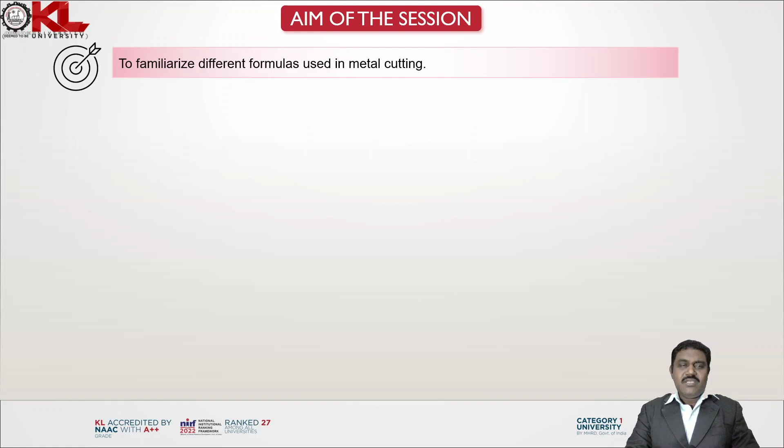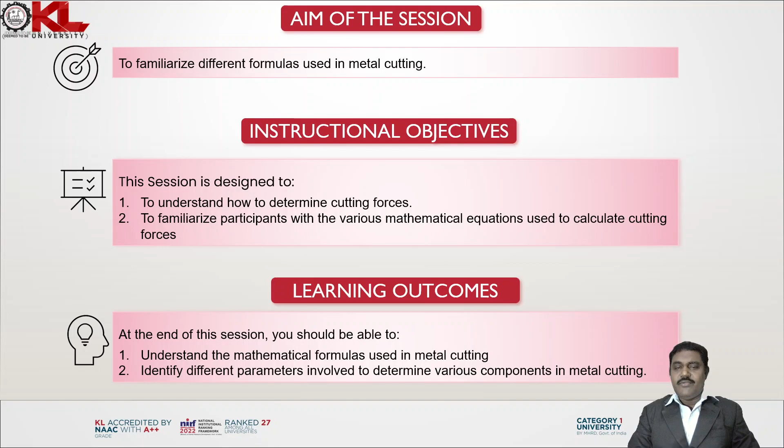The main aim of this session is to familiarize different formulas used in metal cutting. The session is designed to understand how to determine the cutting forces, and to familiarize participants with various mathematical equations used to calculate cutting forces, frictional forces, and all related metal cutting formulas. After completion of this session, students are able to understand the mathematical formulas used in metal cutting and identify different parameters involved to determine various components in metal cutting.

Now let us see what are the different formulas we are using. The cutting speed is denoted by the letter V. V is equal to pi into D into N, where V is the cutting speed in meters per minute or feet per minute, D is the diameter of the cutting tool in mm or inches, and N is the rotational speed of the cutting tool in revolutions per minute. The units are very important because finally the cutting speed units are meters per minute. Accordingly, the substituted data should use similar units.

Now the second formula, spindle speed N. N is equal to V into 1000 divided by pi into D. N is the rotational speed of the cutting tool in revolutions per minute, V is the cutting speed in meters per minute or feet per minute, and D is the diameter of the cutting tool in mm or inches.

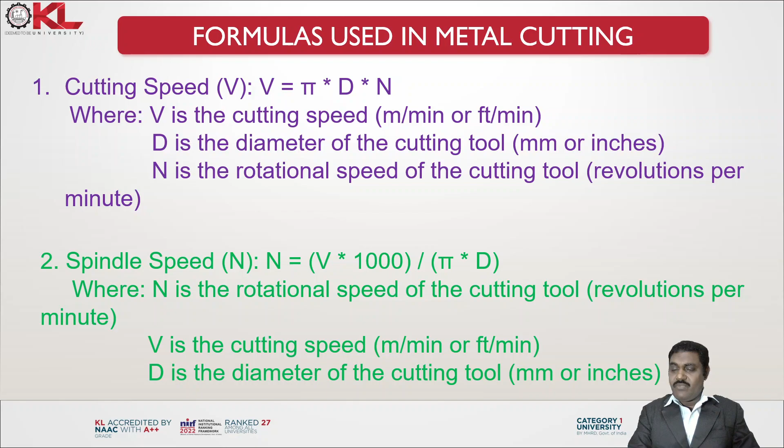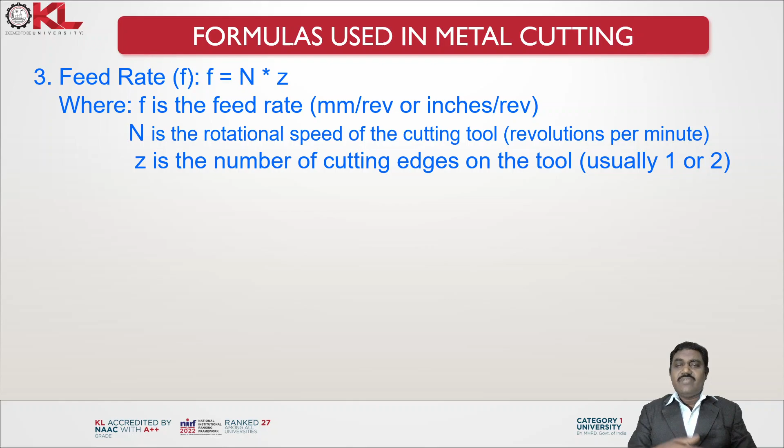Third formula, feed rate. F is equal to N into Z, where F is the feed rate in mm per revolution or inches per revolution, N is the rotational speed of the cutting tool in revolutions per minute, and Z is the number of cutting edges on the tool, usually 1 or 2 cutting edges.

The metal removal rate, MRR, can be found out by F into F into L, where MRR is the metal removal rate in mm cube per minute or inches cube per minute, F is the feed rate in mm per revolution or inches per revolution, and L is the length of the cut in mm or inches.

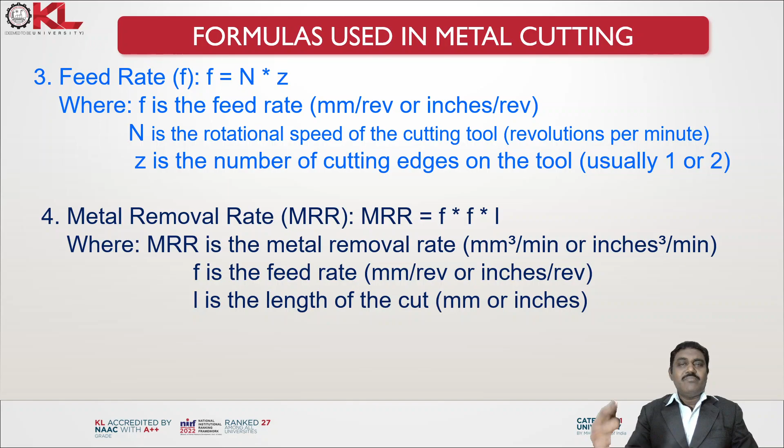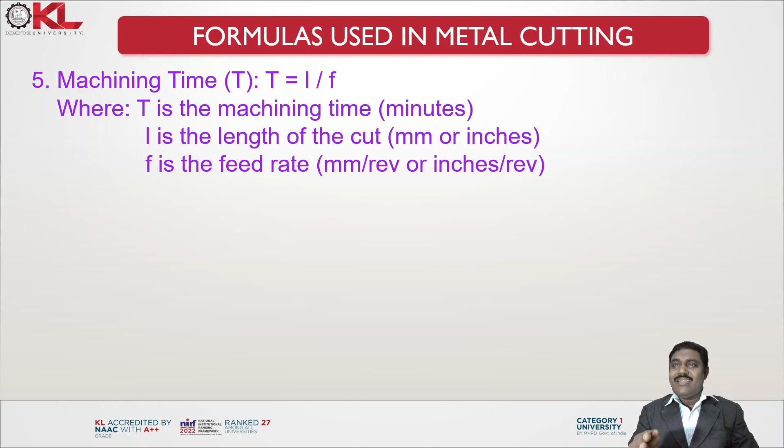Next, the fifth one is machining time. You can determine the machining time as L by F. T is the machining time in minutes, L is the length of the cut in mm or inches, and F is the feed rate in mm per revolution or inches per revolution.

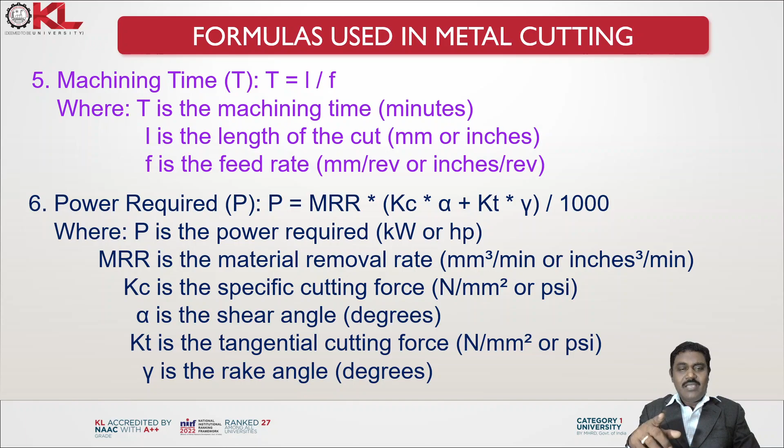The sixth formula, power required. P is equal to MRR into Kc into alpha plus Kt into gamma, divided by 1000. Where P is the power required in kilowatts or horsepower, MRR is the material removal rate in mm cube per minute or inches cube per minute, Kc is the specific cutting force in Newton per mm square or PSI, alpha is the shear angle in degrees, Kt is the tangential cutting force in Newton per mm square or PSI, and gamma is the rake angle in degrees.

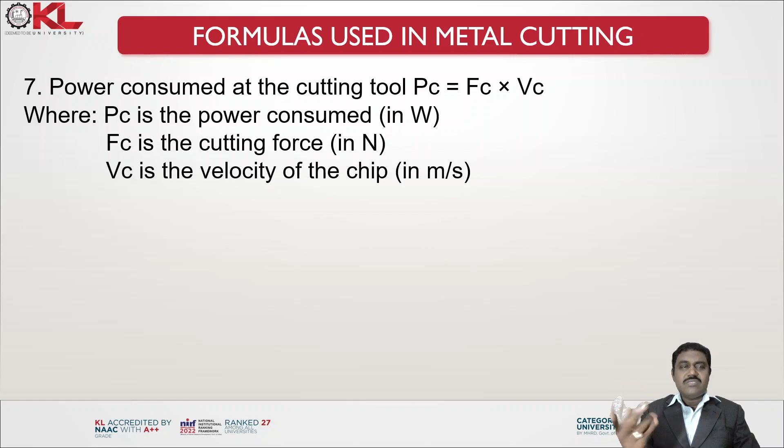Seventh, power consumed at the cutting tool, PC, that is Fc into Vc. PC is the power consumed in watts, Fc is the cutting force in newtons, and Vc is the velocity of the chip in meters per second.

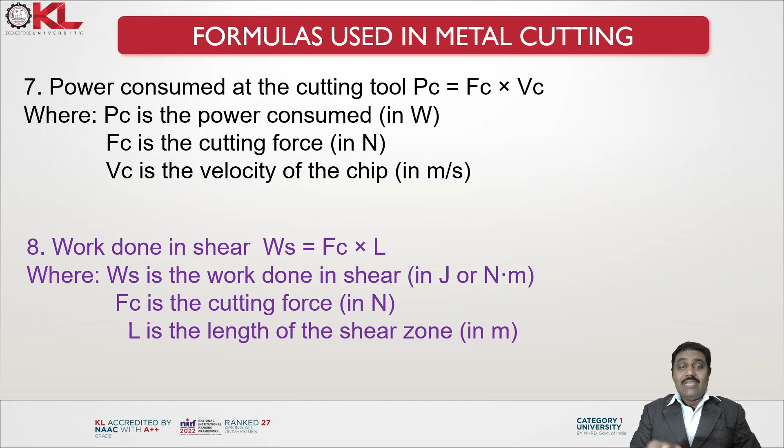Work done in shear: the work done is the cutting force into the length of the shear, Fc into L, where Ws is the work done in shear in joules or Newton meter, Fc is the cutting force in newtons, and L is the length of the shear zone in meters.

Next, the torque developed on the workpiece. How much torque you are applying is obtained by T equals P into 60 divided by 2 pi N. T is the torque developed on the workpiece in Newton meter or lb feet, P is the power required in kilowatts or horsepower, and N is the rotation speed of the workpiece in revolutions per minute.

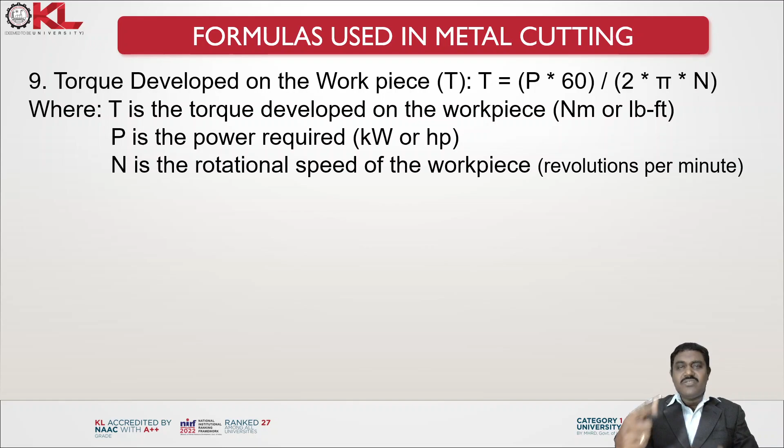Next, 10th is the shear angle alpha, that is equal to arc tan of tan beta by cos phi. Alpha is the shear angle in degrees, beta is the back rake angle in degrees, and phi is the friction angle in degrees.

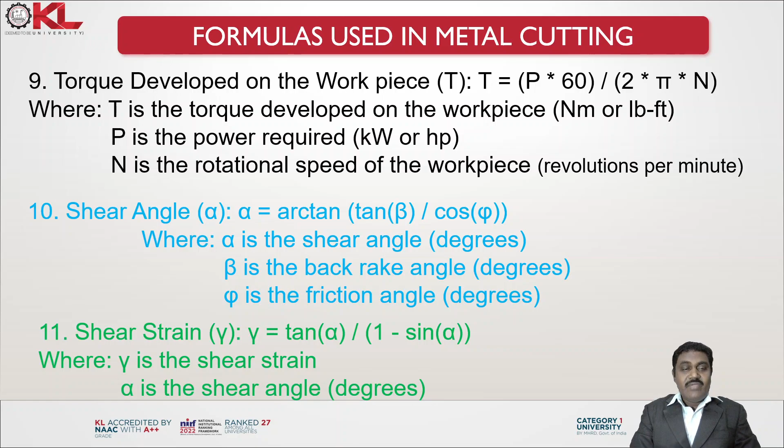Once you know the three angles, you can find out the shear angle alpha. Shear strain: the shear strain is tan alpha by 1 minus sin alpha, where gamma is the shear strain and alpha is the shear angle in degrees.

12th, coefficient of friction. Mu is equal to tan phi, where mu is the coefficient of friction and phi is the friction angle.

13th, cutting force. Cutting force is obtained by Kc into MRR. Fc is the cutting force in newtons or LBF, Kc is the specific cutting force, that is Newton per mm square or PSI, and MRR is the material removal rate, that is mm cube per minute or inch cube per minute.

14th, thrust force. Ft is equal to Fc into tan alpha, where Ft is the thrust force in N or LBF, Fc is the cutting force in N or LBF, and alpha is the shear angle in degrees.

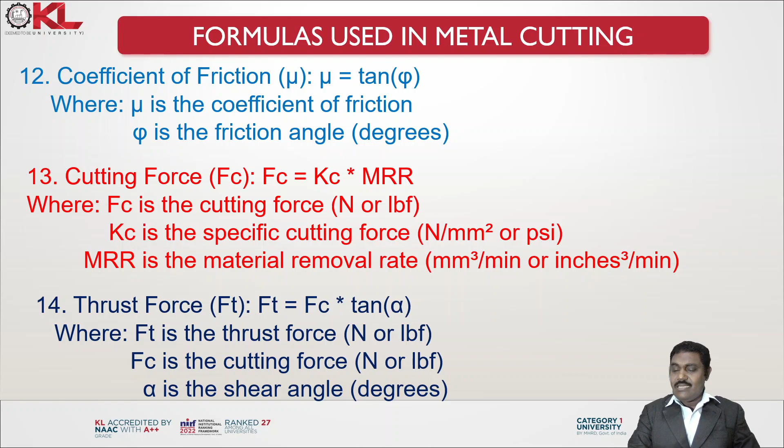15th, radial force. Fr is equal to Ft into tan phi, where Fr is the radial force in newtons or LBF, Ft is the thrust force in newtons or LBF, and phi is the friction angle in degrees.

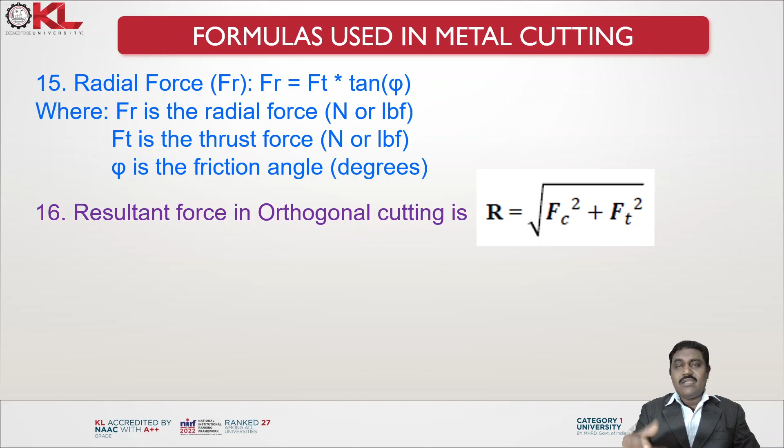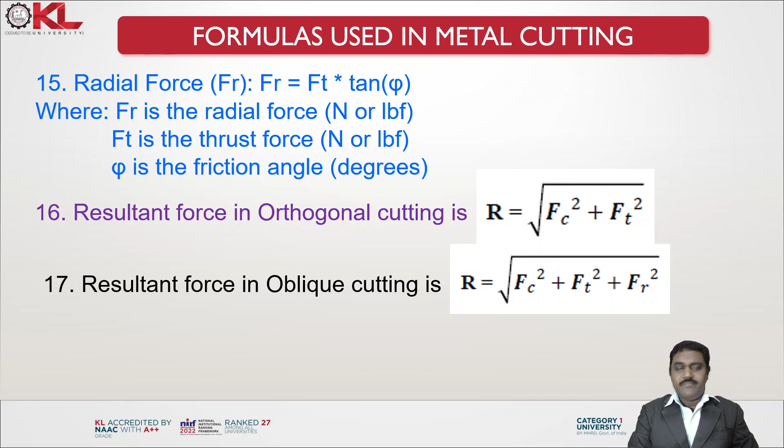16th, resultant force in orthogonal cutting: R is equal to square root of Fc square plus Ft square. And resultant force in oblique cutting: R is equal to square root of Fc square plus Ft square plus Fr square. The three components of force are acting in oblique cutting.

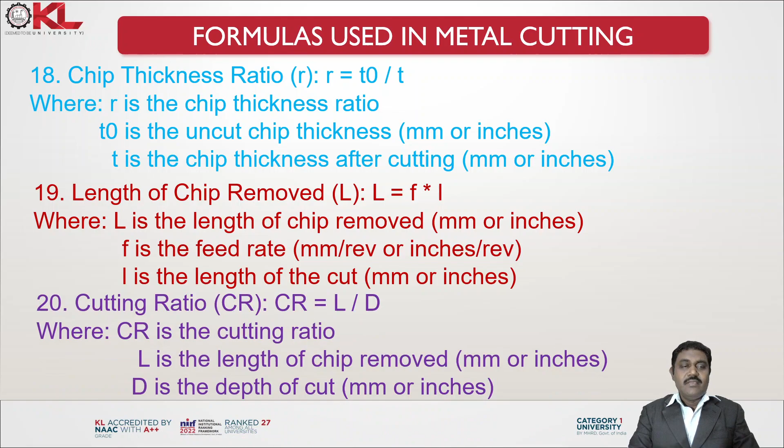20th, cutting ratio. CR is equal to L by D, where L is the length of the chip removed in mm or inches, and D is the depth of cut in mm or inches.

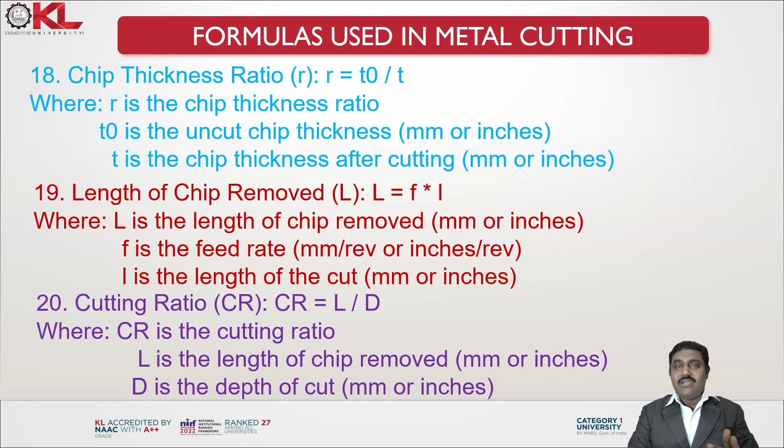21st, compression force. Fc is equal to T into W into D, where T is the chip thickness after cutting in mm or inches, W is the chip width in mm or inches, and D is the depth of cut in mm or inches.

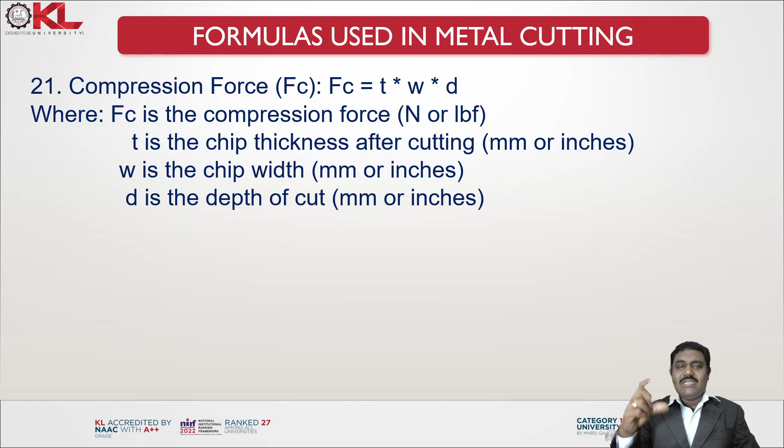22nd, velocity of the chip along the tool face, that is obtained by pi dn by 1000, where Vc is the velocity of the chip in meters per second, D is the diameter of the cutter in mm, and n is the spindle speed in RPM.

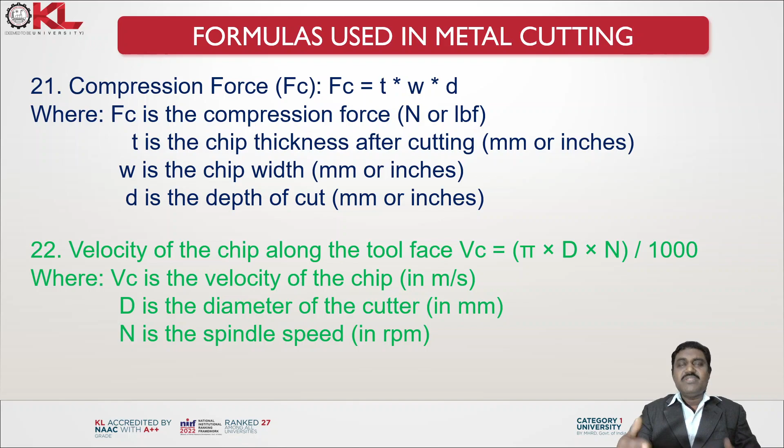Normal pressure on the chip is obtained by Fc by A, where P is the normal pressure in pascals or Newton per meter square, Fc is the cutting force in newtons, and A is the area of the shear zone in meter square.

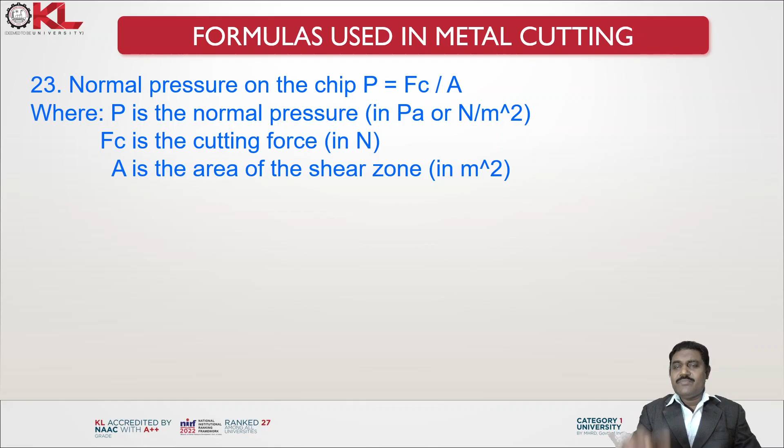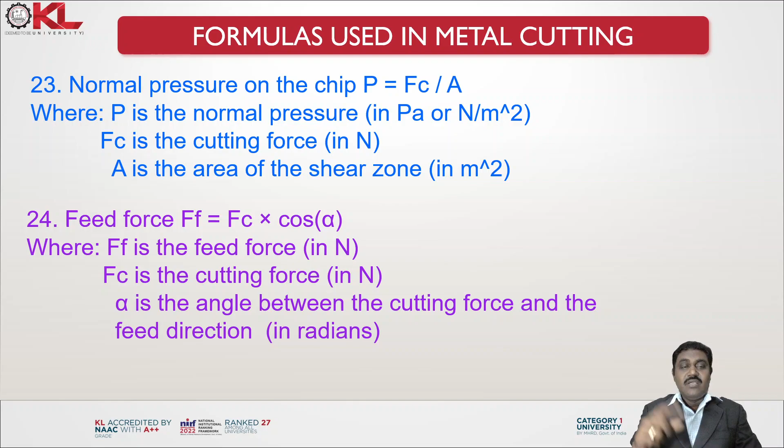And feed force, that is Fc into cos alpha. Ff is the feed force in newtons, Fc is the cutting force in newtons, and alpha is the angle between the cutting force and the feed direction in radians.